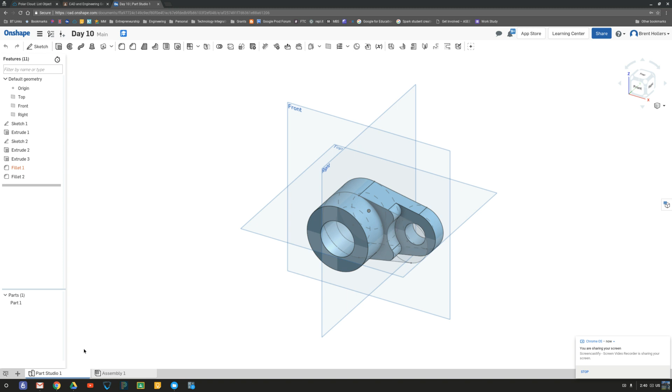So I'm going to right click and choose export, and I'm going to call this Hollers toothbrush holder.

Now, by the way, before I get to exporting this, keep in mind that this is going to be an STL format. If you try to go and get a toothbrush holder from Thingiverse or something like that and just pop it in there thinking you're going to be able to print it, that's not going to work. First of all, Onshape won't translate it that way. And secondly, I'm going to require you to submit the file itself. So don't try to cheat by shortcutting this and just finding models of toothbrushes and bringing them in. I will know if you imported an entire toothbrush—I'll be able to see the different features and how you put them together in the timeline. So you do need to design this entirely on your own. Do not try to import things.

So I gave it a name. STL stands for stereolithography—that's the flavor or format we're going to export it as. And this says units millimeter. Understand, you can design your toothbrush in centimeters, inches, millimeters, whatever—this is just the output dimensions, and it will convert everything for you. Just make sure this says millimeter. Do not change this to inches.

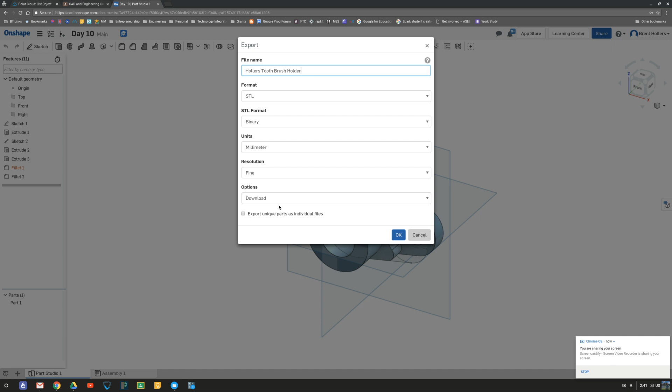And then we're going to download it, and the resolution is going to be fine. I hit OK, and I'm going to save it to my downloads. You could save it to your drive if you want to.

And then I'm going to go to Polar Cloud—you should bookmark this from when we signed into it the first day of class. In here, you should have My Objects. I'm going to click on Upload, and click on this button here. Then I'm going to find my toothbrush holder and open it, and a preview will pop up here. Now, if I click Upload and nothing happens, sometimes you'll see a little black box here that says you need to wait to let it render a preview. So give it a few seconds if it doesn't, and then hit upload again.

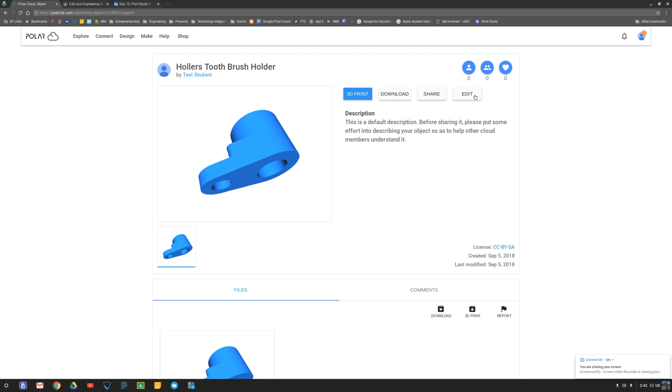So then you'll have your file here, there's the name of it. If you need to change the name, you can click on edit. This can always be found in the Explore button under Objects—so there's your objects, Object Shares with Me, and Community Objects. I will put community objects out there for you as well, which you are now part of. If you go to groups, the Gold One CAD and Engineering community—all the members are in here. Objects can be placed here.

So if you find a really cool object and you want to share it with the community, you can do that. And then we also have access to all of the printers here as well. You'll see that a number of them are actually running right now. Because you're part of this community, you now have access to all of our printers.

So I'm going to go back to objects, click on this object, and click 3D print. Now this may be confusing to you. Some people will choose 'my school'—you don't want to do that, because you have access directly to the printer. So you don't want to choose my school.

You actually have a printer you have access to, so you're going to click on 'my printer.' Just remember this—check that, remember the selection, and send job. Then it's going to ask where you want to send the job to, and you can choose any of the printers.

I would stay away from the BT 3D printer—that's the one in my office. It's got a circular build plate, which you might find a bit confusing. So let's just say that this is the printer that I want it to go to.

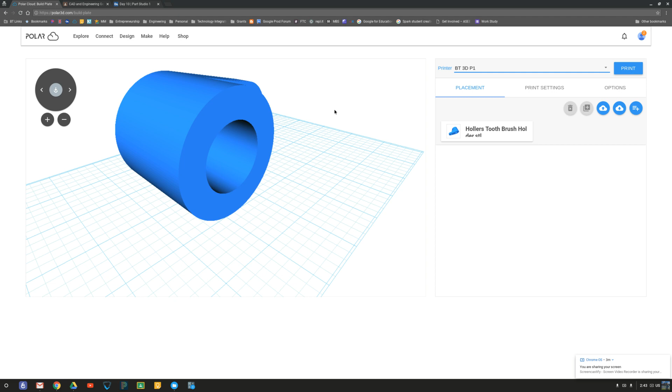This object, the way it sits right now, is not the way I want it to lay. So I can actually move this back and forth. I could scale it if I want to, but hopefully your dimensions are already correct for your toothbrush holder before you import it. I can scale it by dragging these boxes, making it larger and smaller.

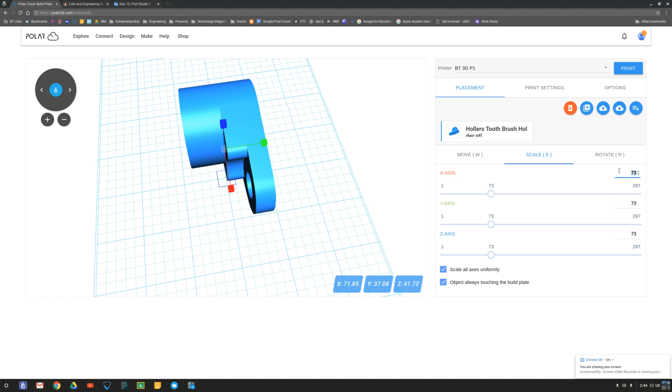You'll notice that it does move quite a bit very quickly, and it will always scale uniformly. I don't want that, so I'm going to drag it back down to a reasonable size—I'm going to do 100. There we go, that's the size it should have been originally.

You'll notice that this is laying on its side, which is not terrible, but it's not going to give me good platform adhesion. So I'm going to rotate this by grabbing these handles—I can rotate it this way, or this way. If I rotate it that way, I can release. Notice it's at 91, so I'm going to change it to exactly 90.

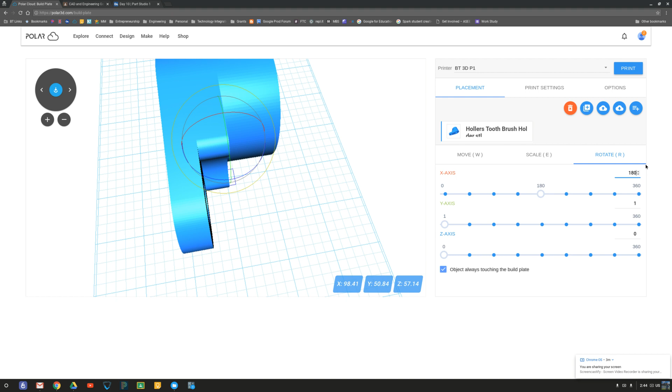Oops, another 90. Yep, 180. We'll try this again—there we go, 270. That's what I'm looking for. You'll notice it's flat on the build plate.

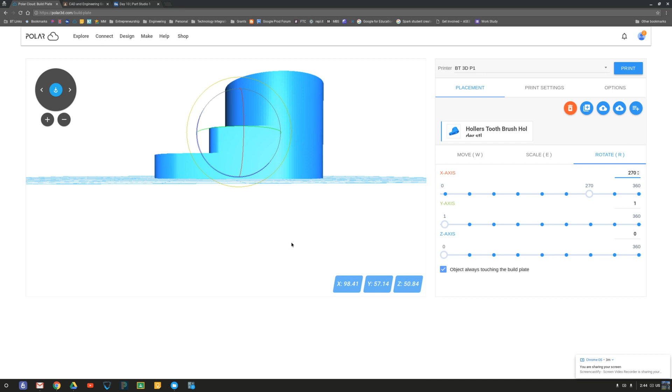You always want to keep this checked. By default it is checked, but I want it flat on that build plate so it's not underneath—that's not floating in midair, because that would be bad as well.

Once you've done that, you're going to go to print settings. For all of your prints, you're going to choose the PLA 0.3 millimeter draft quality. And in basic, you're going to choose the infill—for everyone, it's going to be 15%. Do not choose 30 or 45. I will decline your print and you will get a zero.

Make sure you set these print settings the way they're supposed to be. 15% means that's how much density the object has. You don't need a super dense toothbrush holder—the more density you choose, the longer the print takes.

Shell thickness means the number of exterior walls before you get to this fill pattern. The more shells, the more sturdy the object is. Again, 2 shell thickness is plenty for this particular design. If we were doing something that gets banged into a lot, or subjected to other stresses, we might do additional shells or additional densities.

Then resolution: draft, medium, and high. We're going to leave it as draft—for a toothbrush holder, we don't need a lot of detail. If we wanted really nice fonts in it so it looked really clean, we would go with high detail, but keep in mind that as you increase the resolution, it's going to take more time.

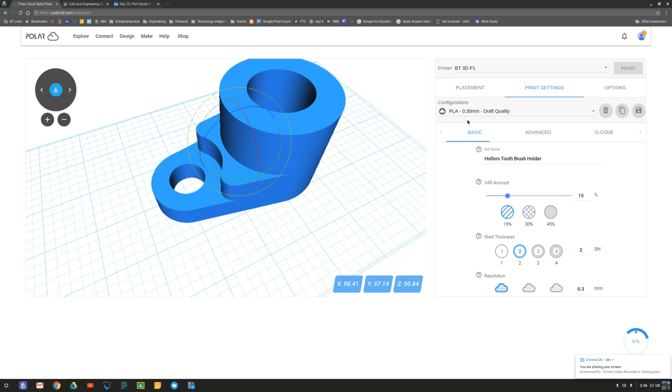And then we want to choose raft—always make sure you choose raft. That will make sure it adheres properly to the build plate. Once you've done that, you can click on print, and it will now queue the job and say waiting to slice.

From this point forward, you do not do anything else. I will start the prints once the build plate is cleared and ready to go. So you queue it up and then leave it alone, and I will print it from there. That's also why it's important to include your name on any objects you want printed, so I know whose they are and can label them as such.